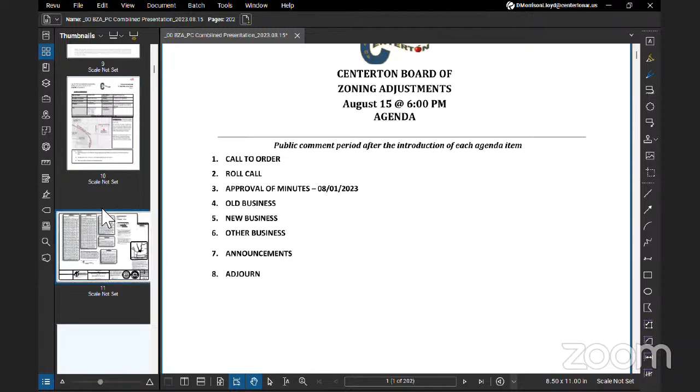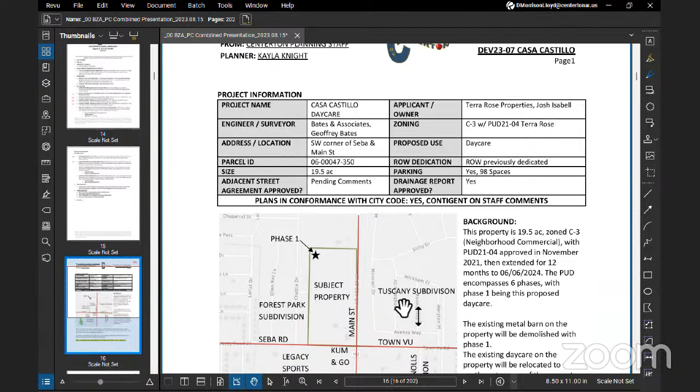You have that listing. So you guys asked what changes were made between the last previous approval and this one. So I made a list and attached it to the back of the report. That gives you all the stuff that happened with the plans, and then the little changes that were made to the adjacent street agreement.

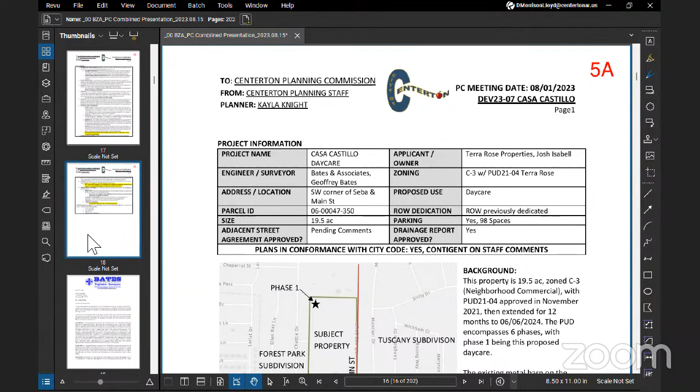So you guys approved the preliminary plans, but I asked that you make that contingent on staff comments. And also you wanted to know more about what the traffic study said. So in the folder, you'll see the traffic study that was included, and then we sent that to Garver to review the traffic study and make any comments they needed on it and kind of digest it for us. I think they're here to talk about it.

We're basically talking to Kayla. I know that y'all are looking at the traffic study to help determine what adjacent street improvements and things are going to be needed for this development. So there's kind of a lot riding on this. Our traffic engineer said that some of the methodology and the types of reports that they used throughout, he has questions on why those were used specifically. You'll see that sort of notated in there.

So I think basically we want to look at the base of how they're making their plans. And this is pretty normal in engineering. There are several different ways to go about looking at things, drainage, traffic, all of it. And so that's why you have an engineer look at it and kind of ask questions.

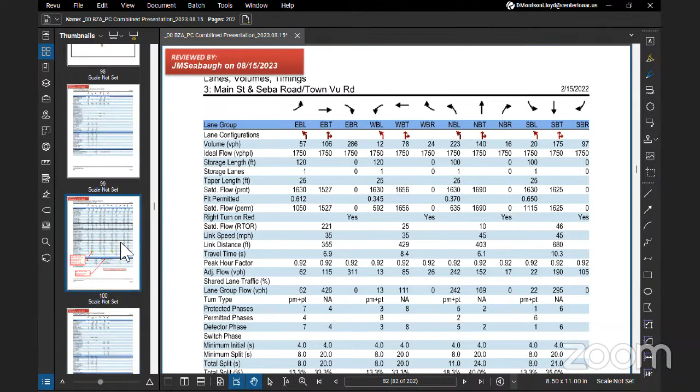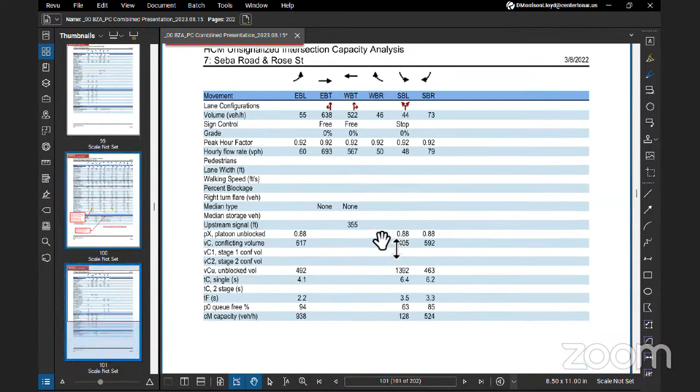Here's the thing, nobody wants anybody to do more than their proportionate share. That's the whole thing with the off-site improvement -- you're trying to look at what their proportionate impact is. So that's what we're trying to do, but if we can't get the base numbers right, even something that works right, then how are we gonna -- if you don't have that piece correct, or something that makes sense -- then how are you gonna look at the proportionate impact?

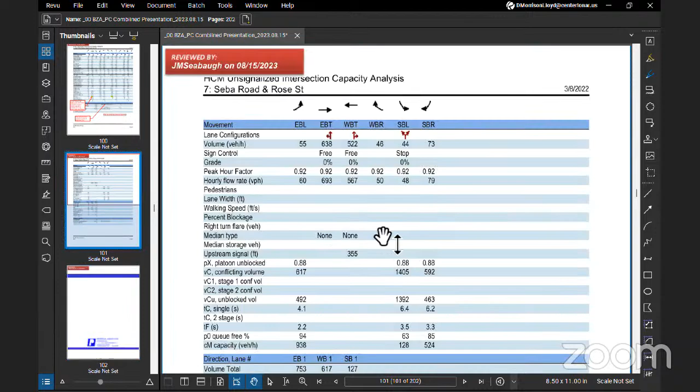And I do think the Kum & Go one's got to be looked at. But didn't you say the Kum & Go one did say that they anticipated there was gonna be a dedicated right turn lane? I think so, I have to look at it again. And that's kind of what this one's saying, so I think between those two, that'll be something to look at as well, once we get the number of facts. Everybody will be good.

We need to wait until we get that. After this, everybody's got it, right? The approval for Kum & Go was contingent based on getting the adjacent street agreement and fee in lieu agreed upon, so there's still some wiggle room there, because we haven't settled on that yet.

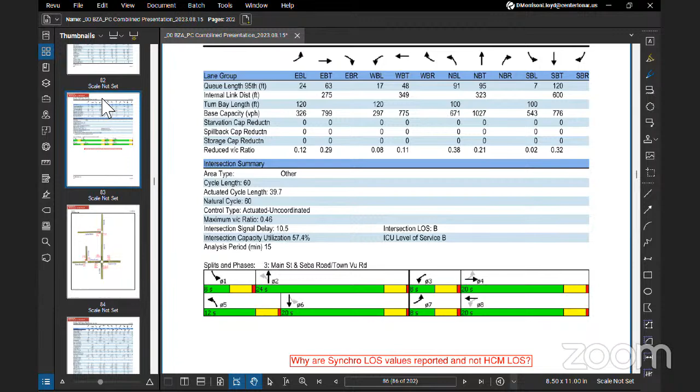I've got a question. Help me understand, you're recommending a SimTraffic analysis? What's that, a software? How is that done? There's several different modeling software. This is the way I understand it - so they run things differently. SimTraffic runs interactions between multiple sections, simulates interactions between them.

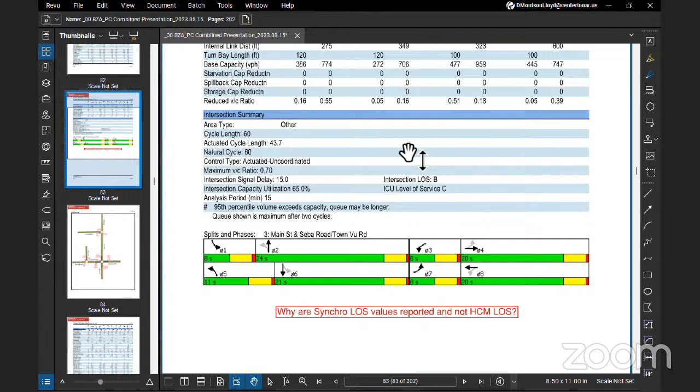One of the things they were concerned about was that the queuing for both on Seba is gonna back up, and then it's gonna start interacting with one of the intersections they're creating, Bell, and it could even interact with the intersection at Chattie, even further down. We don't know, but that's what he's saying. We'll find out tomorrow.

So with that, that's a TxDOT approved methodology - that SimTraffic analysis, TxDOT approves that for their warrants using that software. Is that a software that... I don't know if I can definitively answer that, but I can get more information.

What are your thoughts? Sorry, say it again - put you on the spot, but you're the traffic guy. No, I agree with her analysis. I mean, I think, you know...

Peter, the company that did this is a verified firm, they do traffic studies statewide. It's not a fly by night firm that did the study. But I think I agree with Julie - probably more information is needed because, according to what I'm reading here, it didn't take the whole picture. It's like a piece of pie, and we need the whole picture in my opinion to see what the requirements need to be.

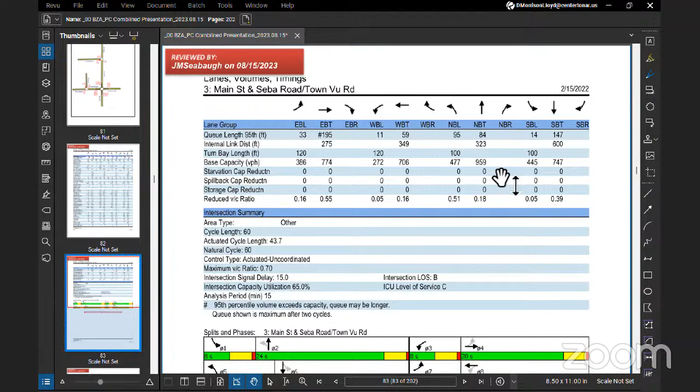And then any other comments in the report that would be part of the approval - there were special conditions and general conditions, which we'd love to show you and read. You may have the reports in front of you, so you could look at those. I think it's all good. The only one I don't see here is the approved use of aluminum fencing around the pond. It's here, we just haven't gotten a resubmittal yet, but yeah, that was talked about.

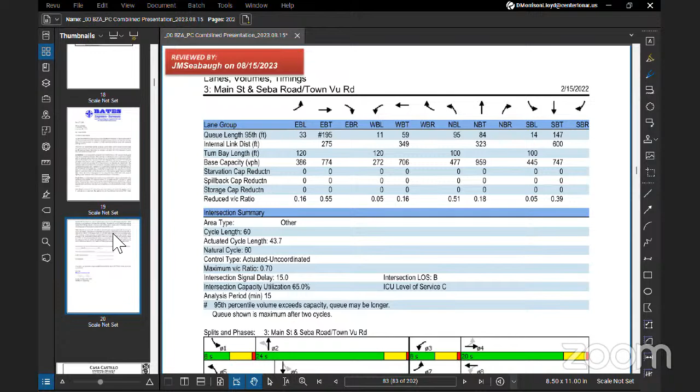I believe you guys talked about having trees along the north side of the property where there aren't trees, and some other things that are still pending a submittal. The lighting plan hasn't been updated to include some additional street lights and parking lot lights we added, like around the dumpster and in the parking lot. So any approval really should be contingent on making sure there's no light pollution, and on the landscaping, adding those trees along the north.

So, both Brad, wrought iron, right? The fence around the pond. Yeah, that was, you agreed on the aluminum. Okay, and our code states the top rung will be 5 feet. So that was the minimum that we have, whether that's what you want to ask them to do.

We have another development that is doing, I think, some type of metal fencing also, but they said they'll do whatever the code says, so I don't know if that's something y'all want to discuss or not. There's a difference, but I think they mentioned 5 feet themselves - I think they will do standard 5 feet, with the aluminum.

Wrought iron, so whether that's one of the conditions - yeah, adding that as a detail. It wasn't in there. Yes, but the motion just stated that the development plan was approved, it didn't state any of these conditions that are in the report.

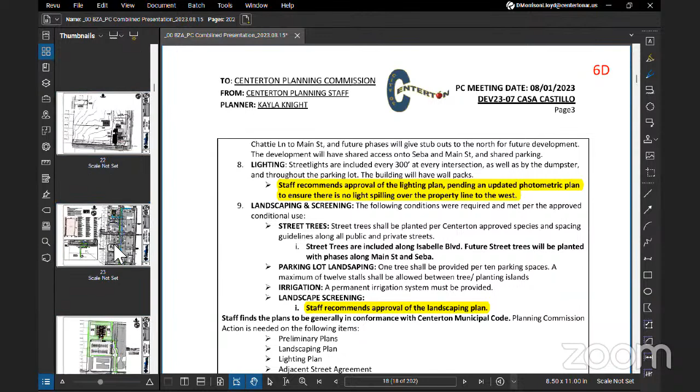Okay, anything you want to add? The only thing to add is it's contingent on like the adjacent street agreement, but it would just be with the development of the sidewalks to you guys. But we're not approving anything with the street agreement, is that correct? Right, we're not. Okay, yeah, it's probably not gonna make it tonight. But that's fine, we can discuss it whenever we do discuss that street agreement. But no, there's nothing else. Adam, thank you, we'll make you up on the street here.

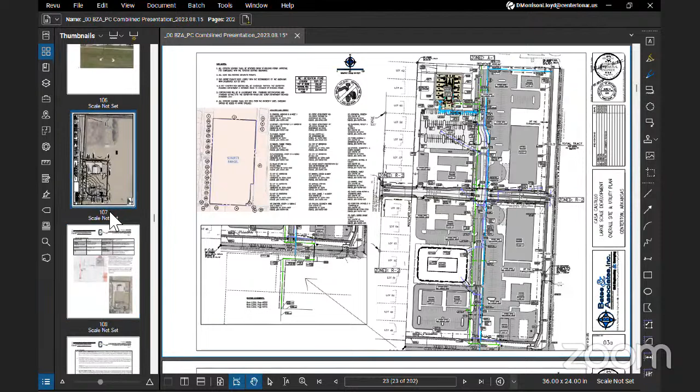This is John, I'll motion to approve development 2307, the daycare, with the included conditions in the staff report. Without the... Tony, I second. Is anyone voting? Yes.

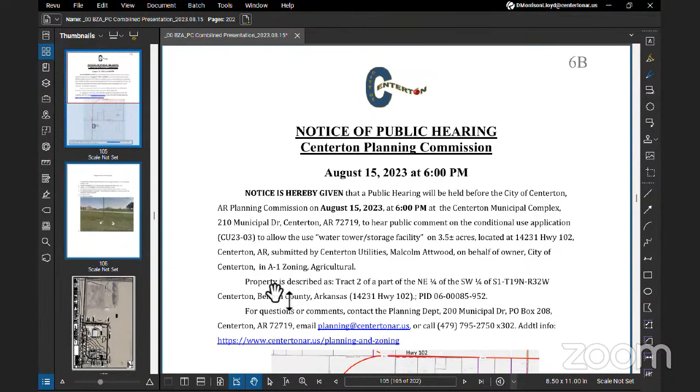Next on the agenda is a public hearing for conditional use 2303, the Centerton Water Tower at 14231 Highway 102. It is on 3.5 acres, and the request is to construct an elevated water storage tank.

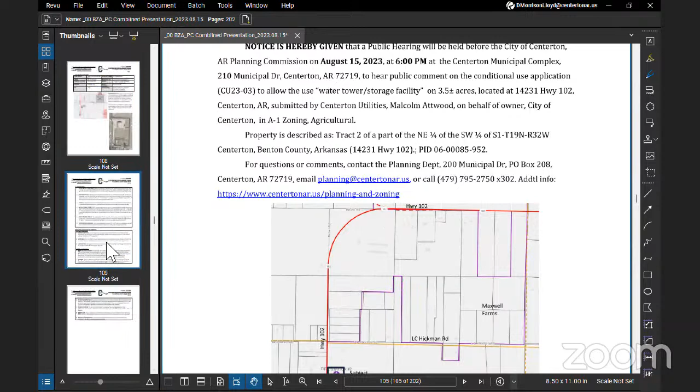Are you here to speak? Are you here to give comments? I'm forwarding that. We'll have time for that in just a second, okay? Give me just a second. If you want to have a seat, it'll take us just a little bit, it'll be time. Oh, we'll call it, okay?

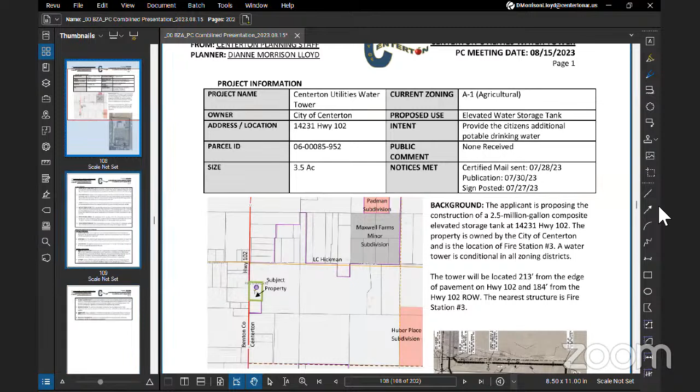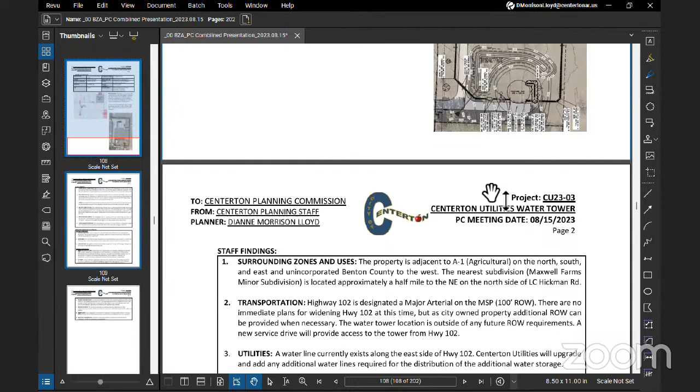The tower is 165 feet tall from the foundation to the top of the access hatch, which is the very tippy top of the storage tank. The storage area itself is 110 feet in diameter, and the supporting pole is 60 feet in diameter. The closest current structure is the fire station, approximately 182 feet to the north of the water tower.

A detention pond is also located adjacent to the tower, just to the north of it, curving around it, so that there's a pond in the event of a leak or something similar.

The adjacent properties are agriculture to the north, south, and east, and unincorporated Benton County to the west. On the other side of 102, the nearest subdivision is Maxwell Farms Minor Subdivision, about half a mile to the northeast, on the north side of LC Hickman Road.

For utilities, they will be putting in any water lines needed for the use of the tower. There won't be any employees stationed there; maintenance staff will continue working at their current location on Keller Road. As for deliveries, they have a diesel backup generator, so there will be periodic diesel fuel deliveries to keep it running.

The only landscaping or screening proposed is a 6-foot chain fence topped with barbed wire. Currently there appear to be 6 existing trees along the frontage of Highway 102.

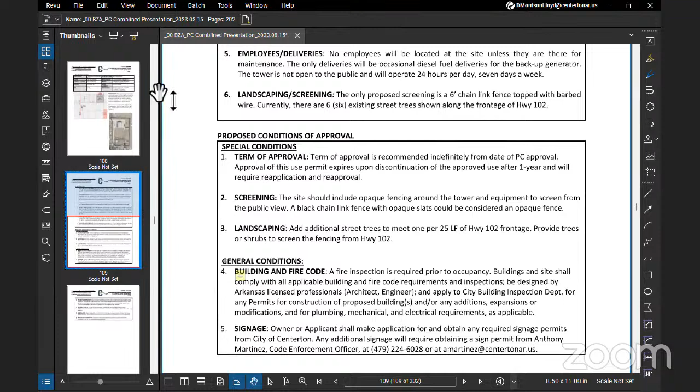Yeah, if you'll do - I will. Okay, this is coming back to you all. It's been a year ago, but this was - you had approved a draft and we didn't get it codified, so we are bringing it back for public hearing.

Keeping that this time, there's a couple of - I didn't go through this previously, but there's a couple of recommended changes. With the wireless communication towers, in certain zoning districts they could receive administrative approval, or they would go through a conditional use.

This lays out what they would be required to do, whereas right now, just like the water tower, we have nothing to really guide us. This would give them requirements - we get this quite a bit from wireless communication companies wanting to know what we require, and also about relocating on an existing tower.

So previously we had that communication towers shall be allowed by conditional use permit only within all zoning districts, with the exception of agriculture, where I would like the commission to consider adding industrial districts - your light industrial and heavy industrial. That way, they would only be allowed by right if they meet the requirements in regard to minimum size and use, and the tower is set back at least 100 feet, or a setback distance of the tower height, whichever is greater, from an existing residence or residential property.

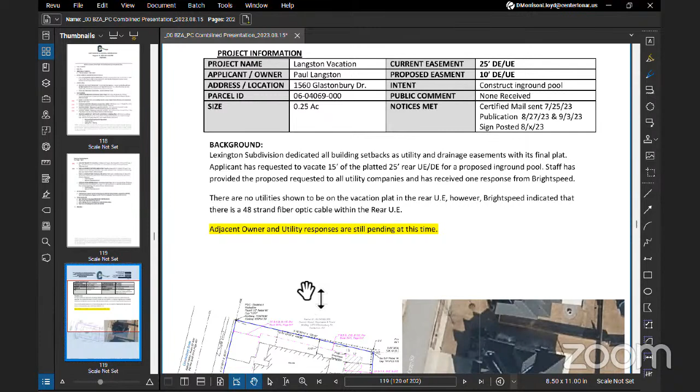Yeah, I think we're - walk us through what you're requesting. Basically, just put a... Eric, are you doing the staff report? Yes, sir. Since Lexington has dedicated all their building setbacks to be utility and drainage easement, a vacation would be required to allow for the installation of an in-ground pool.

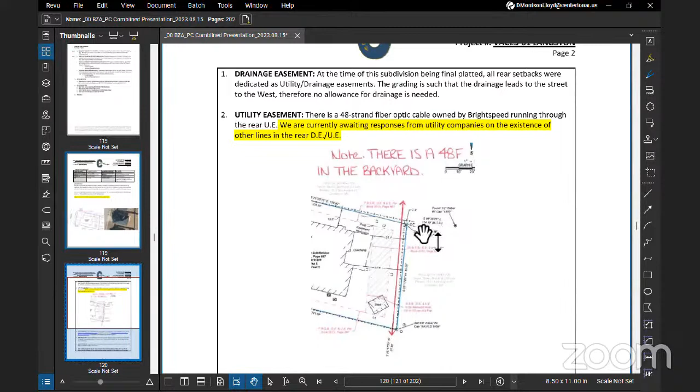So the applicant has requested to vacate 15 feet of the 25 feet of utility easement for the in-ground pool. There are no utilities shown on the plat, but we received a comment from Brightspeed indicating there's a 48 strand fiber optic cable running within the easement. However, what they provided as an exhibit doesn't show it to be an easement reduction issue. Carroll Electric came back and said they do have an existing line within the easement area, but potentially there's no conflict based on the location of the transformer. If any line needs to be removed or gets damaged, it will be at the owner's expense.

As far as the drainage easement is concerned, the way the grading is such that the drainage leads into the street and not towards the back, so there's no conflict with interfering with the drainage easement. We have received, of the 3 abutting property owners, 1 response saying there's no objections to the vacation. That's all it is.

So it shows that you're still awaiting responses from utility companies. How many utility companies are you waiting on responses from? Two. The others have come back saying they don't have any objections. That's - you said you're still waiting from Cox, right? I think Cox is correct, down on the street side. They would have no issue.

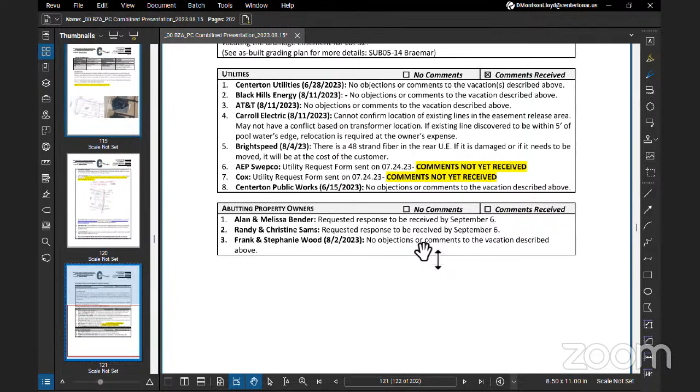All right, next on the agenda is vacation request 2302, Henson. Request to vacate 15 feet of the utility easement at 101 Florence Drive. This is R2, lot 69 of the Tuscany subdivision. The applicant here - the request that you're looking for.

David Henson, 101 Florence Drive, Centerton.

Similar story here - we want to put in a pool in the backyard, and to get the pool the way we wanted it, it's going to have to encroach upon the existing easement.

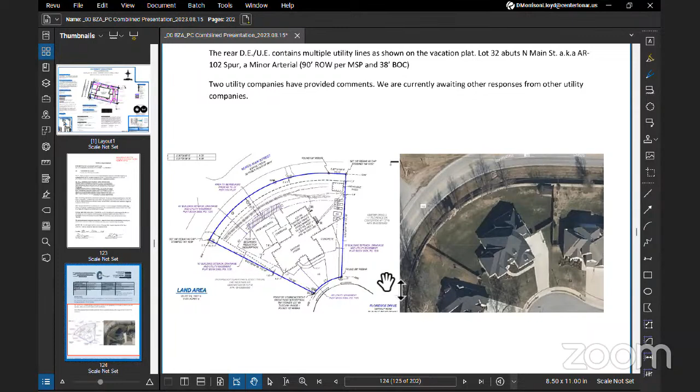The applicant has requested to vacate 9 feet of the platted 40-foot rear utility and drainage easement, located at 101 Florence Drive in the Tuscany subdivision. Tuscany has dedicated all civil and setbacks as utility and drainage easements. The rear drainage easement contains multiple utility lines shown on the plat, and it also abuts North Main Street, which is considered a minor arterial for the Master Street Plan. That would be built out to a 90-foot right-of-way per the Master Street Plan, with 38 feet width from back of curb to back of curb.

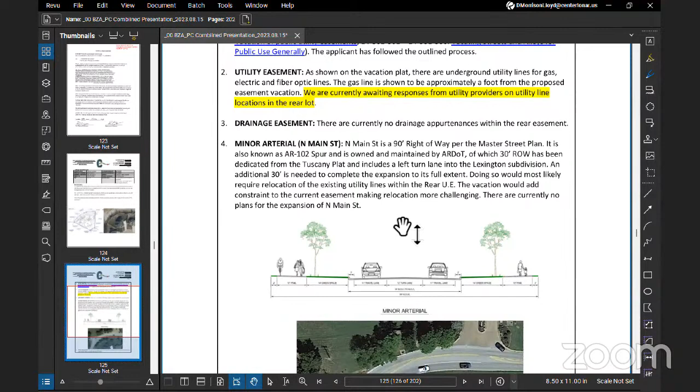We have comments, I'll get to that soon. As shown on the vacation plat, there are underground utility lines for gas, electric, and fiber optic, and there's a gas line shown to be approximately a foot from the proposed easement vacation. There are no appurtenances related to drainage in the rear easements.

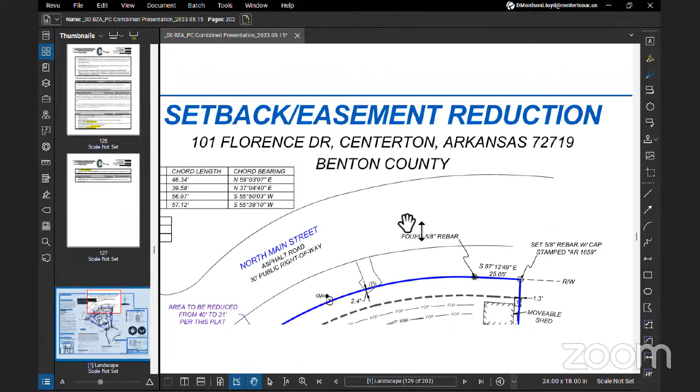Say something at this point. Yes sir, the gas line - they said it was a foot, hopefully there's only a foot between the proposed pool location and the gas line. You know what that means?

According to the plan... yeah, I don't know, I've got pictures. We had Safe Dig come out and mark out all the utility locations on the property, and it's more like 10 to 11 feet of room from where the gas line is to the edge of the proposed pool.

From the diagram, it's not just the pool, there's a retaining wall going in as well, and that's going to be 0 to 1 feet on top of it. The wall really shows for building the pool. So to me, the retaining wall would have to be the outer limits of what would be included in the pool measurement, you know what I'm saying? I'm not even sure if the retaining wall is going to be required, but if it is, it wouldn't make much difference. The edge of that retaining wall is where you start your vacation, wherever that starts. So however much that retaining wall extends, you have to account for that. Even though the pool might not be there, if you add sidewalk, retaining wall, everything - it's all counted, you don't want that to encroach on the easement.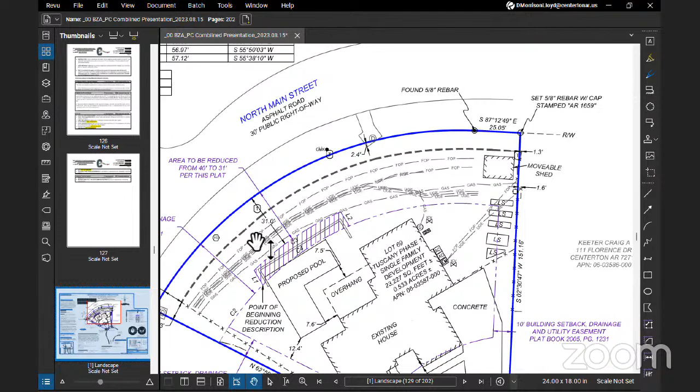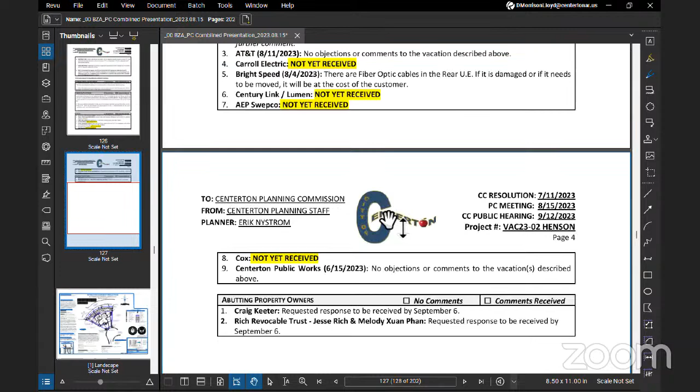We're just going by what they've got marked on-site. Well, I've got pictures there if you want to see. We can't speak for that. We sent out approval forms for every utility company, and they've come back with comments, we'll get to that here. The Safe Dig people will come out, they represent the utility - sure, we'll tell you where the utility is, we'll take a look at this.

You have a comment, Wayne? Well, as he gets through the utility comments, Centerton Utilities has a water line there. My concern is building on top of this water line, and whether they'll even allow it. You can't build a pool on top of a water line, that ain't... yeah, there's a water line in place. That's what Malcolm said.

One thing to comment on is the right of way. Since Main Street is a 90-foot right of way per the master street plan, should expansion take place, it would require relocation of utility lines. One concern is that the extent of the easement reduction would likely add constraint to the relocation of utility lines. Currently, there are no expansions planned for North Main Street.

That's an ARDOT-owned right of way, so part of this is not the city's - it was dedicated to the city. That's the plat, yes. There may be some highway prescriptive right involved, but this was all dedicated also with this. So we can put the... so that road - yes, it is still an ARDOT highway.

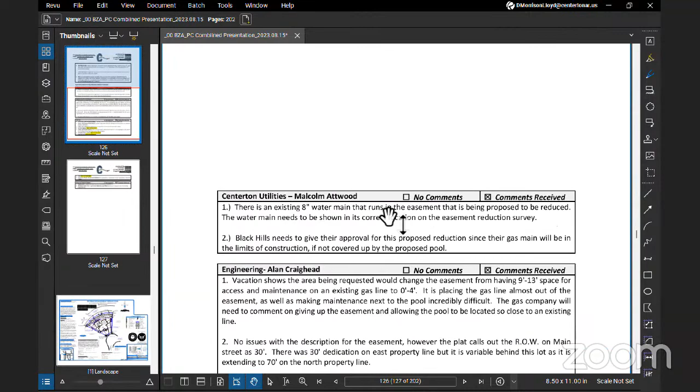We also noticed the space within the setbacks currently shows room where a pool can be located, providing an adequate amount of space without needing or requiring as much of a substantial reduction.

So commenting on Centerton Utilities, there is an 8-inch water main that runs in the easement that is being proposed to be reduced. The water main needs to be shown in its correct location in the easement reduction survey. They call for Black Hills to give their approval for this proposed reduction, since their gas main will be within the limits of construction.

According to Black Hills Energy, there are concerns about the reduction being too close to the line, and we're still awaiting further comment from them.

For AT&T, no objections or comments. Brightspeed, there is a fiber optic cable that runs within the rear utility easement, which if it were to be damaged or relocated would be at the expense of the landowner. We're still awaiting further comments from Carroll Electric and CenturyLink.

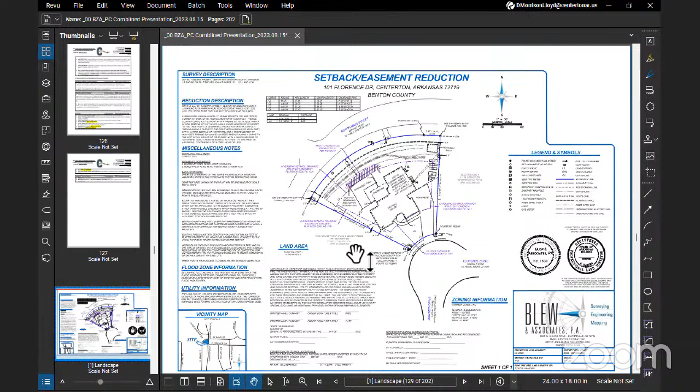Fine, that's it, that's our only option. All right, next on the agenda is application 2303, Thomas. This is a request to vacate 15 feet at 416 Trail. It is on R2, lot 7 of the Oak Tree subdivision. So with that, I have to recuse myself from this one.

This one, right? You're in charge. Yeah, he's going. Yeah.

Sir, the owner is here, survey company. Okay, and I just wanted to say that we're repeating what the previous two had as well on this one, so we'll go back - which is the street, and request to decrease the utility easement and drainage easement. Yes. Take questions about the survey and the documents here.

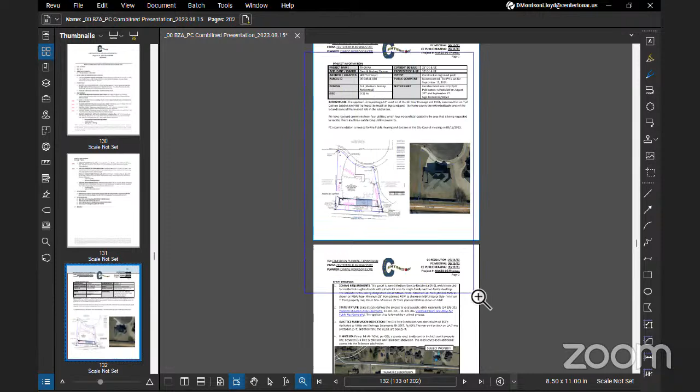Yes, it's pool season apparently. This property is located in the Oak Tree subdivision at 460 Trailwood Circle. They are requesting a 15-foot vacation of the 25-foot rear drainage and utility easement. That would leave them, of course, with the 10-foot easement. Now, one thing with their lot is they do have one of the smaller lots in the subdivision, and the house is built pretty much to the entire buildable area. So that is something to consider on this one also.

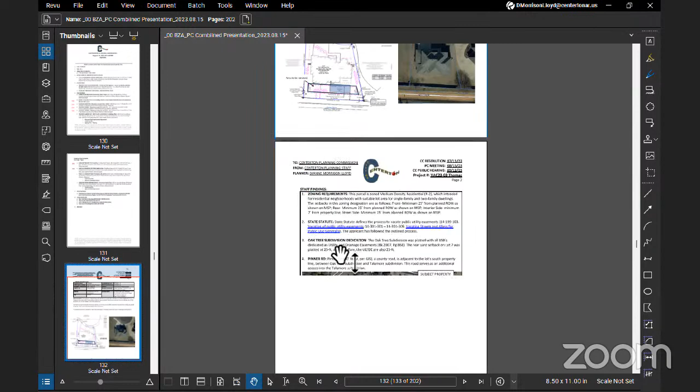We have received comments from all the utilities - forgive me for not updating that sentence. So we have received them from everyone, and there are 2 utilities that are located in that easement. Both of them appear to be south of the area they're vacating, so still within that 10 feet. But I will get back to that in a second. Of course, it is up to you guys to recommend for to go to city council.

This is an R2 subdivision, a zoned subdivision area. And like with the other subdivisions we've seen so far, all of the building setbacks were platted as drainage easements and utility easements. There's not any issues with the drainage for the area. Alan went out there and looked, and there's no issues with the drainage if anything, and that is vacated. So that's good news. We did, and of course, Pinner Road, which is, if anybody's ever been on it, is a small road that runs directly back behind this property and is kind of an extra access for the Talamore subdivision. So if there is a fire or something like that, they do have an excess access.

Measured on the GIS, it is 40 feet. It is a Benton County road, which could be improved someday for further access.

It looks like Oak Tree dedicated 15 feet and Talamore dedicated 25 feet, plus a utility easement. But measuring it on the GIS, it does look like there is 40 feet between any utility easement and right-of-way for that road.

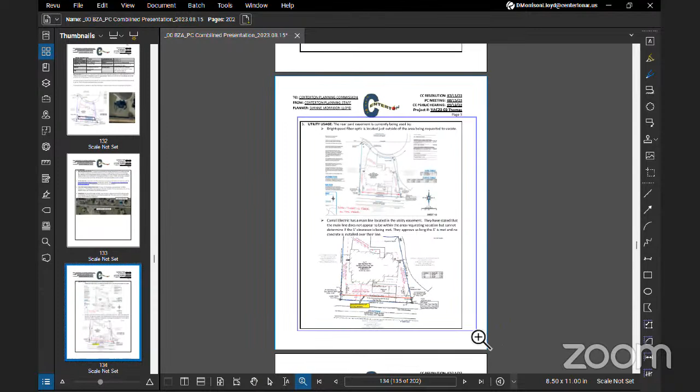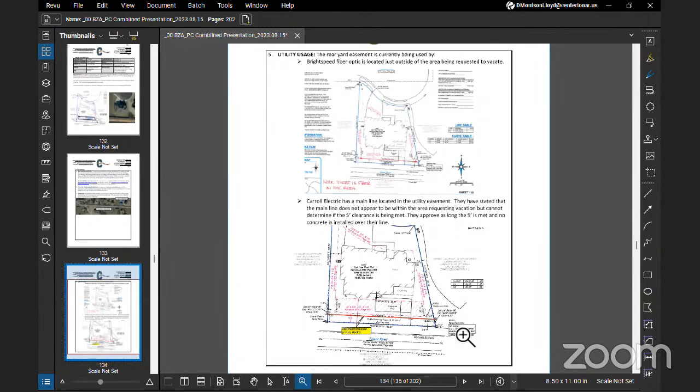Carroll Electric has a main line located in the utility easement, but they stated that as far as they can tell, their equipment is not in the area you're wishing to vacate, it's still within that 10 feet. They couldn't say for sure if the 5-foot clearance was still being met on the other side of their line, so they approve it as long as that 5 feet is met and no concrete is installed over their line. And of course, you break it, you buy it.

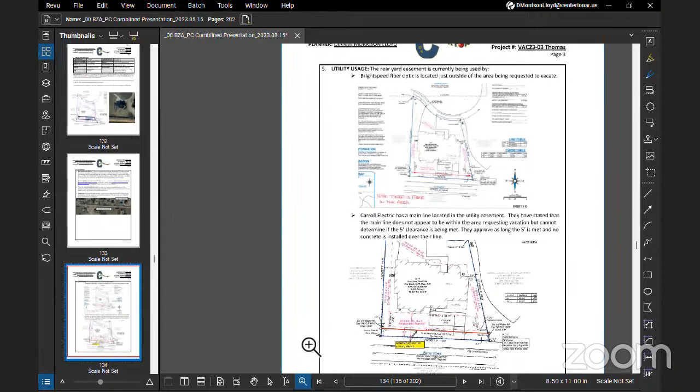Public notifications were sent to the adjacent property owners. We haven't received anything back from them yet - I guess they're on vacation at a pool somewhere. Public hearing publications are set to run on August 27th and September 3rd for the September 12th city council meeting. So if y'all approve it, then it would go to city council.

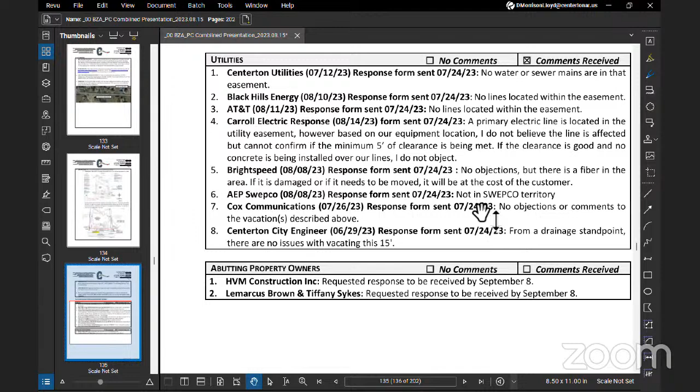They already have a vacation plan completed. I did mention to Nathan there were just a few little minor things on there to fix, which of course would be recorded with the Benton County Circuit Clerk if it's all approved.

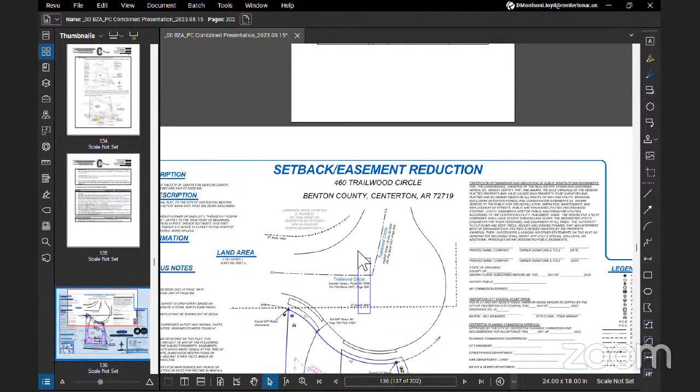There are utilities, but they do not seem to think they're going to be impacted. Just Carroll Electric said they couldn't tell for sure the 5 foot was met. I would like to point out that I just asked them, they marked it. That was the only concern on that one, and it seems to be marked.

What is it, 18 inches on each side of that space, and 5 feet on the outside of that. Right, so we're marking 18, 5. I did notice that Brightspeed and Carroll Electric pretty much have the exact same location for their lines - those were from each of them, I did not draw those. That's what I got from the utility companies.

You didn't understand the price. You break it, you buy it. Yeah.

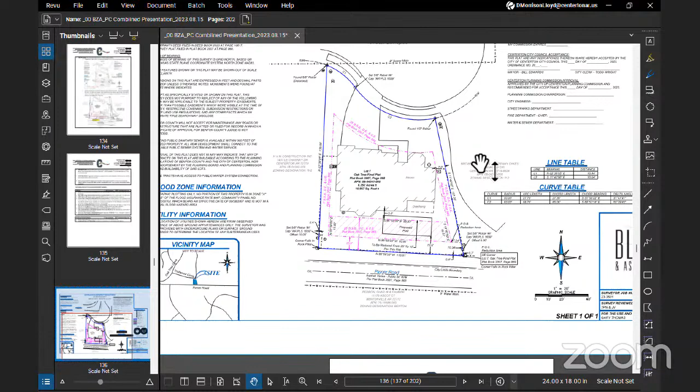Are you not the applicant? I'm Daniel Brady with Phoenix. Want to give us an overview? Yeah, Matt. I have some parking, and then there's only a drive-through for dropping off laundry. The applicant submitted a large scale development for the use of a laundromat, which is permitted under highway commercial as it's currently zoned.

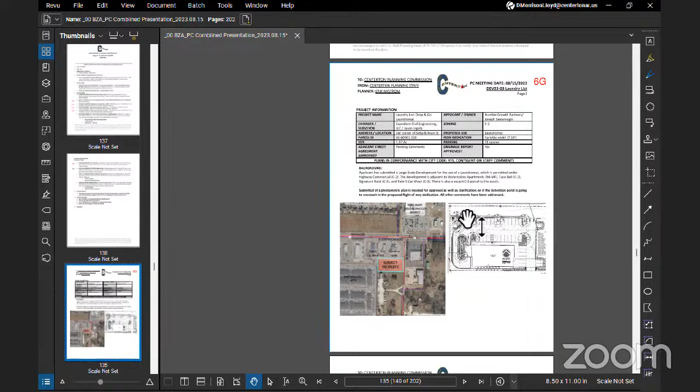The development is adjacent to an R4 multifamily zone and various other commercial establishments. Watercolors Apartments is the only residence adjacent to the subject property.

There's a proposed sanitary sewer connection coming from Greenhouse. There's an existing dry detention pond to the east of the property. It does show that the eastern edge is encroaching on the proposed right-of-way dedication. We need some clarification to figure out who would be responsible for that. There's proposed parking spaces.

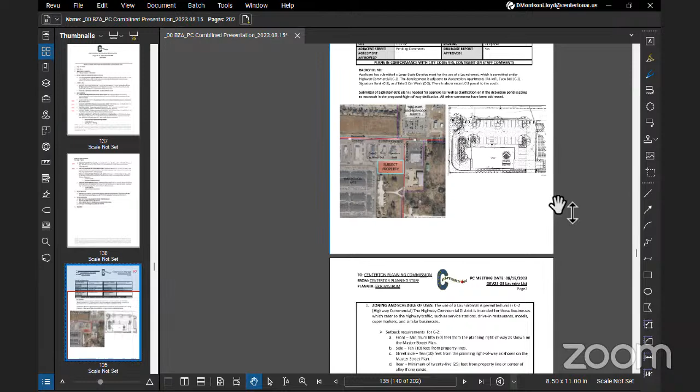There's going to be 31 spaces, 2 of which are ADA requirement, which exceeds the required number of 29. It's going to be located next to Greenhouse Road, a major arterial, and there's an existing 42.85 feet already dedicated. These plans will dedicate 15 feet more to the right-of-way.

Improvements agreed to will include curb and gutter, asphalt concrete road with a 10-foot trail, and street trees. An access easement has been proposed at a stub out near the southeast corner, providing future access to whatever gets developed to the south. There's an existing access easement on the north side of the property, both of which will provide 2 access drives to the commercial subject property.

We're still waiting on a photometric plan, but as it is there's not much conflict due to the commercial and multifamily apartments already providing screening along their property lines. The dumpster enclosure is supposed to be brick masonry.

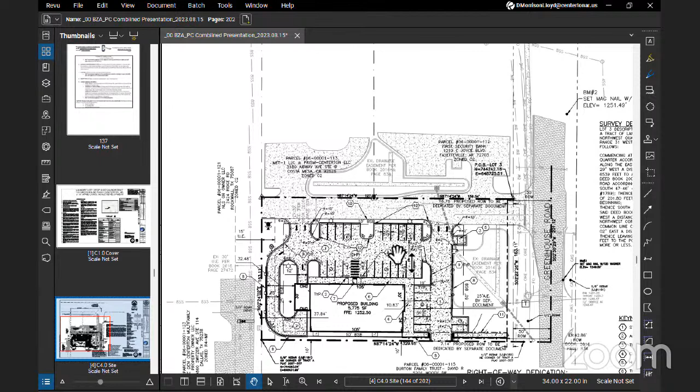There's about 10 trees and 181 shrubs to be provided as far as landscaping goes in the parking lot. There's no opaque screening provided, as I said, there's already screening along the Watercolors Apartments property line. I find the landscaping plan to be satisfactory. So we're looking to approve the preliminary plans and the landscaping plan for Laundry List tonight.

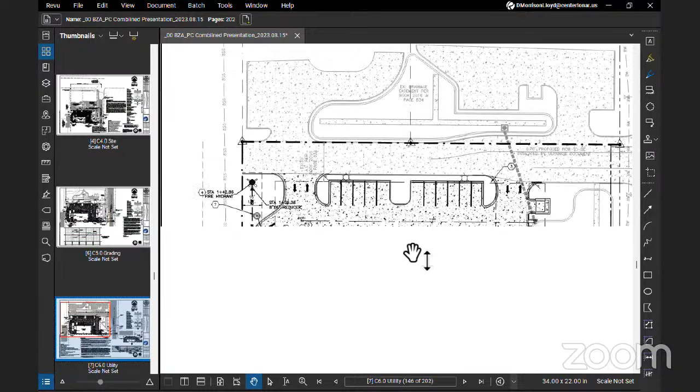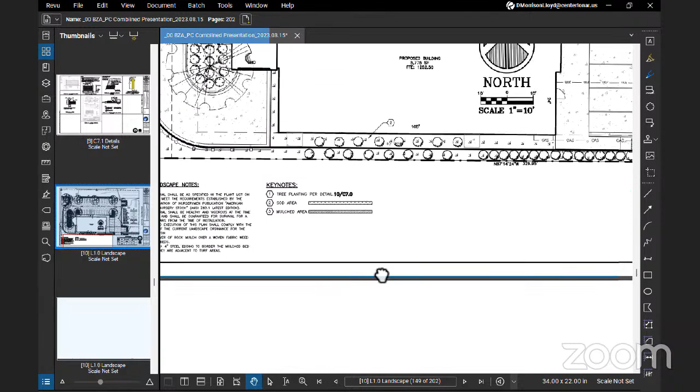With the shared commercial, you have Taco Bell, and yes, where those driveways back up, you're going to have that shared alleyway. The westernmost access is a little bit off, but with the detention pond in the way on the east, it doesn't make that possible. Yeah, with the front, with the rear window.

Car wash further down. I see that your proposed dumpster is for, what about the building, is that part yet on? As far as the building goes, I mean, that's not our part. Do you know what the building will be? I think it'll be partly brick up, and then I don't know exactly. It'll be partly brick.

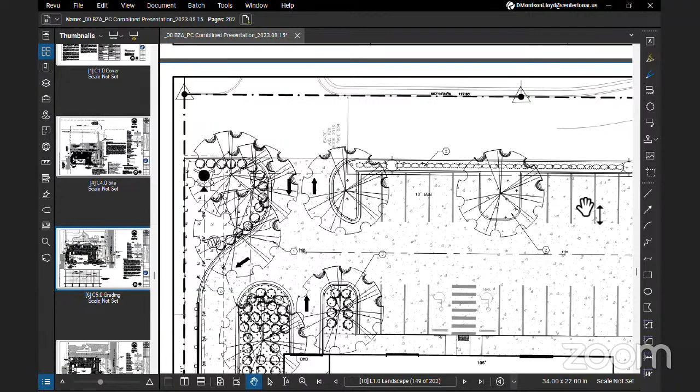All right, next one is subdivision 1909, Tuscany Phase 3, final plat. This is at the corner of North Main Street and Town Vu Road. It is up by 2. This is 15.93.

Yes, this is, as you stated, Tuscany Phase 3. It is 46 buildable lots and 2 unbuildable lots, one of which is a detention lot and the other is a lift station lot. The right-of-way was all previously dedicated in 2014 for all the Tuscany phases. There are 4 phases planned, so there's just one remaining after this one. The drainage report has been approved. The bonds, after some back and forth today, did finally get approved by everybody, and everybody's happy on those today.

They did have a change order from when you guys first saw the plans way back when for preliminary approval. They added a detention pond at that southwest corner. They also did improvements to the existing monster detention pond there by the clubhouse in Tuscany.

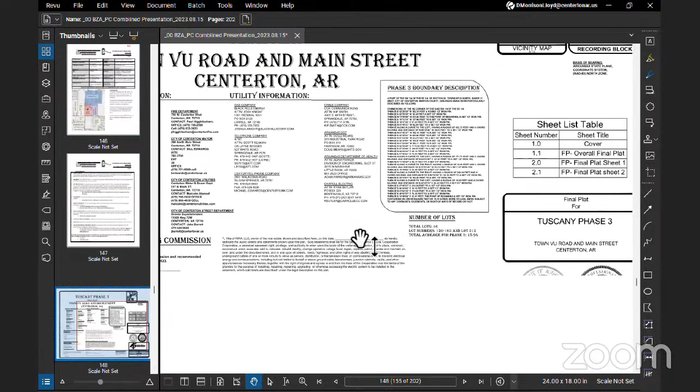They paved the section of road, Longbourn, with phase 2 five years ago. Different builder, different engineer, different owner. That area doesn't drain, so corrections need to be made.

But the way it's divided, beside the clubhouse, that's what, 50, 100 feet, whatever, road right there. Correct. So that needs to be fixed and corrected. So we're looking at for phase 4, they're gonna have to fix that.

There's gonna require significant engineering work to be done. You figure out where the problem is exactly, and then what the best way to solve it. Can't really bond anything for a completion thing, because it can range anywhere from $1,000 worth of work plus surveying cost, to over $20,000 if they'd add a whole new box, open cut, put a culvert in. So we're looking at adding that to phase 4 for the phase 4 group to fix that area.

And that was built 5 years ago. Somewhere, was it March 18th? Looking at Google, there's March 18 or March 20, somewhere between those, that 2-year section. So 4 to 5 years.

And it doesn't have any drainage connection there now. So do you guys tie into that when you put the road? The road was already built, 300 feet south of where this problem is. But the houses in that area were included in this phase for building. So the way the phase line's drawn, the issue is part of this phase, but it was also built 5 years ago.

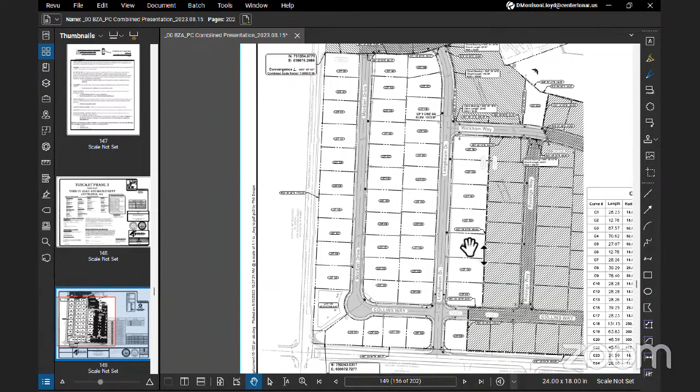One thing they do have attention on is the sidewalk south of that public property. That's already been cash bonded for completion, but we don't have it in hand yet. No, they gave us an estimate, but we do have an estimate that was approved.

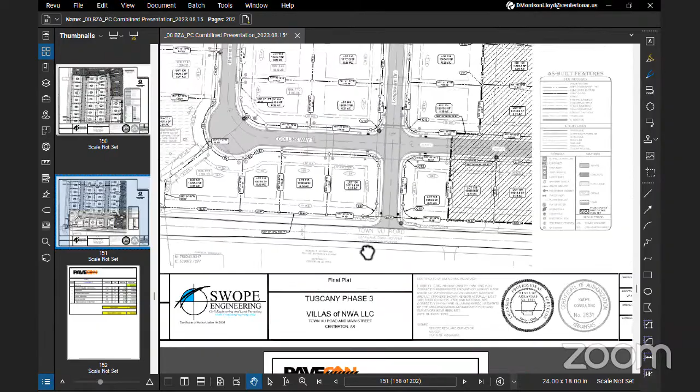And that's for 230 linear feet of 5-foot sidewalk, to connect from Longbourn and Wickham Way on the south side of the clubhouse to lot 212, which is kind of its own separate animal up there, down by the POA property. Yes, it's back behind the basketball goal.

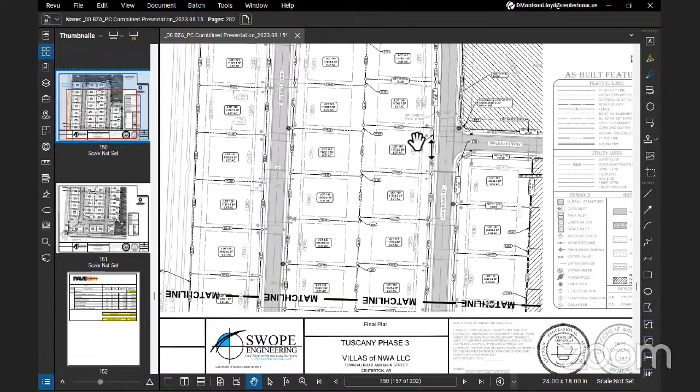And the warranty bonds, like I said, they were approved. Streets and drainage, now we've adopted new rules where it's 50% for 2 years, but since they started previously, they're doing 100% for 2 years, and that's the construction cost, correct, Alan? For the bonds, the 100%? So when this construction started, the original requirement for bonds was 100% of the construction cost. End of last year, we amended the code, so it's now 50% of the reconstruction cost.

That's if we have to go in and fix something, we're pulling the bond, it costs us more if we rip out the curb and re-pour it than it costs to pour it originally. So the unit costs go up, but with 50%, we wouldn't have to replace all the curb, and there's a minor savings. This one started with 100% of construction, so they did their drainage bond at 100% of construction cost, and their street bond exceeds that 50% of reconstruction cost.

And the bond amount is, like I said, approved. We do have drafts of the bonds. It's $796,062.14 for the streets and drainage.

Water and sewer is typical normal where it's 50% for 1 year, which is $204,614.25. And I already mentioned they do have the cash bond for the completion of the sidewalk, the adjacent street agreement. All of that was completed years ago. Like I said, the record drawings just have some minor comments, just labeling and things like that, and same thing with the final plat.

So based on the information that we have, staff finds the plat to be generally in conformance with the Centerton Municipal Code.

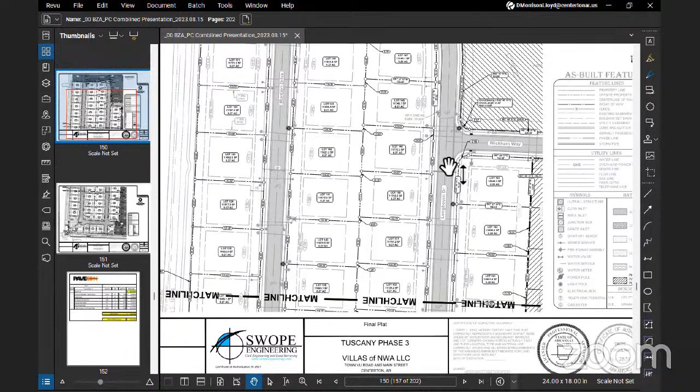Let's see, you can see phase 4 as well. I do have that, yes, this was for me. Oh, is that updated after it was printed? So the streets is 55,631. Yeah.

There's a matter. Any other questions or comments from the commissioner? There's some minor cleanup, typical staff comments, but otherwise, that's all.

With that, I would entertain a motion for subdivision 1909, Tuscany Phase 3, final plat. John Bush moved to approve subdivision 1909, Tuscany Phase 3 final plat, with public comment on the drainage at phase 4. Motion and a second. Is anyone opposed?

Thank you. I have a question about this next one. I own property next to that, it adjoins it. Yes, you probably should. I will call on the... Just note that Jerry is recusing, so.

So it's $497,379, and water sewer is $414,315. Okay, I can't see your... The density is 3.3 units per acre.

Any outstanding comments? Like I said, the covenants are being taken care of. The as-built and final plat was just minor labeling, cleaning stuff up, nothing that makes any big changes. It is our 3rd subdivision. Like I said, they do have the 2 detention ponds. Alan has approved the drainage, and the site inspection, all punch list items have been completed on this one.

Edgewood, between Edgewood and Shirley Estates to the south. All of Edgewood Road has been paved from the edge of their property all the way out to Tycoon, so that was completed with this. There's just super minor comments left on final plat and as-built.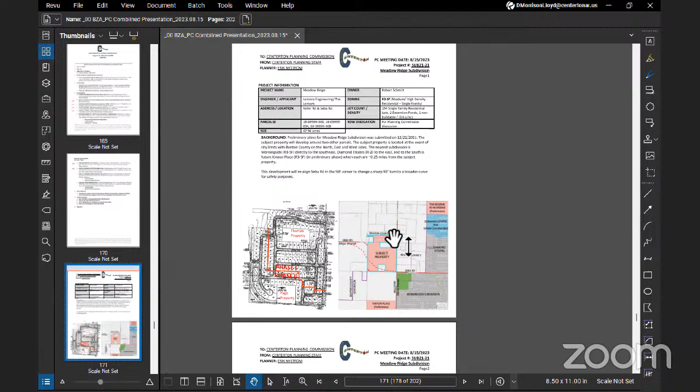The lot has been proposed to be split into 2 phases. Phase 1 will consist of the northern, northeastern part, lots 1 through 99, a total of 99 lots including the lift station and the detention pond to the north. Phase 2 will consist of 55 lots with a detention pond. We'll have access to water from both Keller and Seba. The lift station will be installed with phase 1, with the force main running south parallel to the west side of the road, eventually tying into lines in Morningside. It's not located within a floodplain. There are currently 2 freshwater ponds which will be filled and need to be compacted.

There will be access for phase 1 from Keller Road on the east side, and phase 2 will have access from a western, southern access way from Seba Road. Both of these right of ways will be proposed to include 10-foot trails.

Per the adjacent street agreement, 40 feet of right of way should be dedicated on Keller Road with a 10-foot trail, asphalt and a ditch, no curb and gutter as of now, with a 14-foot green space. There won't be any street trees due to constraints from the grading of the ditch. There will be light poles on 300-foot intervals along Keller.

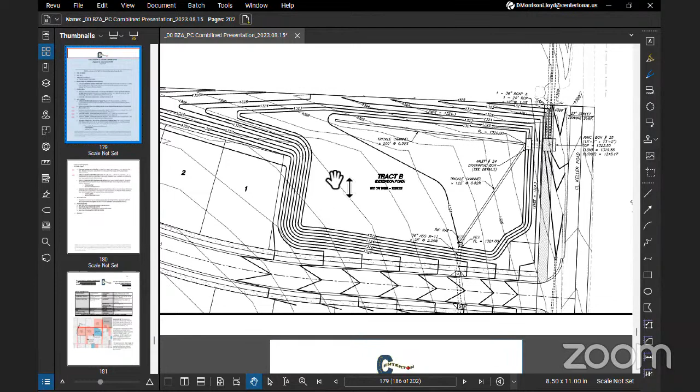Then I have to slam on the brakes to make the turns, instead of continuing at your normal speed. Improvement.

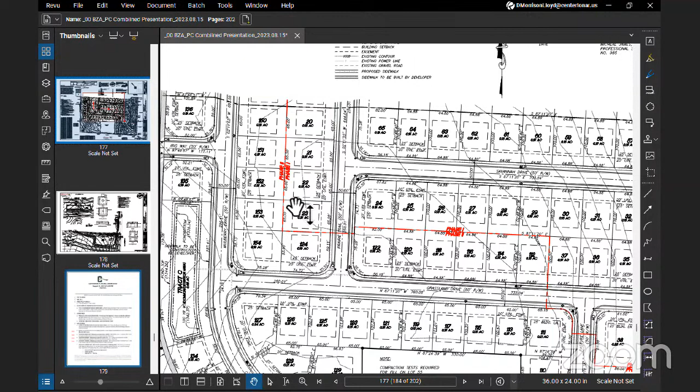We still need the cost estimate for the construction of SEBA so we can work on the cost share. But everything going on right now is just on Keller Road with phase one. Phase one will pave Keller from the corner to the north property line.

Is the adjacent street agreement ready for approval, or just the subdivision preliminary improvements? The agreement just states that there will be cost sharing, but doesn't delineate what exactly that cost sharing is.

Not hearing mention there's no curb and gutter. Correct, yeah, the adjacent street agreement is just paving the dirt road and putting ditch lines in between the road, the ditch, and the trail. Just behind that's a force main, so there's nowhere to put trees along SEBA, whether it's in the right of way or on Keller - anytime we do anything there they'd get mowed right over. And then anything just behind the right of way is on top of the force main, and I'd rather mow over a tree than run up a force main. So there's really nowhere to put one anywhere on Keller.

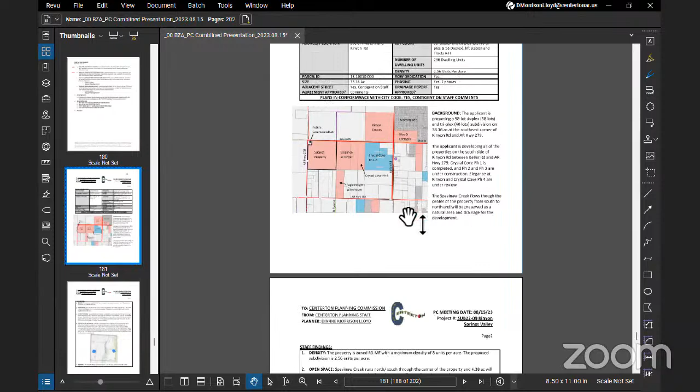They are dedicating right of way and doing 2 phases. The drainage report has been approved, and the adjacent street agreement comments are pretty much under control. The applicant is developing all of the properties pretty much from Keller Road all the way to Arkansas Highway 279, so this is the far most western project. There is also Elegance at Kenyon and Crystal Cove Phase 4 currently under review that will go between this and the Crystal Cove Phases 1 through 3 on the very far east.

And I think the density is 2.5856. We have a cricket. 2.56 units per acre. It is R3 multifamily, which has a maximum density of 8 units per acre, so they are definitely under that. Yes, I'm totally distracted by a cricket.

Open space, like I noted, the Spavinaw Creek runs south to north through the center of the property, and approximately 4.3 acres remain undeveloped due to wetlands and drainage in this area. They are making every effort to save as many trees as they can through there, but they do have to do some grading through that area. It will be a nice, pretty area for the subdivision.

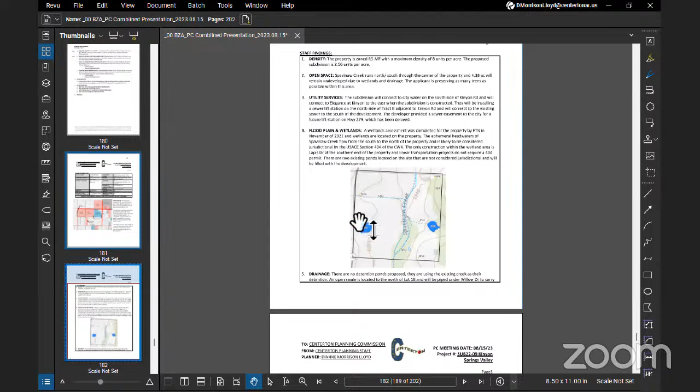Utility services: they are connecting to city water on the south side of Kenyon Road, and it will connect to the other subdivisions going in to the east. There is a lift station on the north side of Tract B, right up by Kenyon Road. There is an existing easement along Spavinaw Creek that the owner dedicated to the city a while ago for a future lift station that is on hold right now to help with that area. So they are having to do a lift station.

They have completed a wetlands assessment for the property, done by FTN in November of 2021. There are wetlands located on the property. There is no floodplain, but Spavinaw Creek flows south to north through the property and is likely to be considered jurisdictional by the USACE under section 404. The only construction within that wetland is a street; Lapis Drive will cross over it at the very southern end of the property. But linear transportation projects do not require a 404 permit, so they are good to go with just the road crossing there.

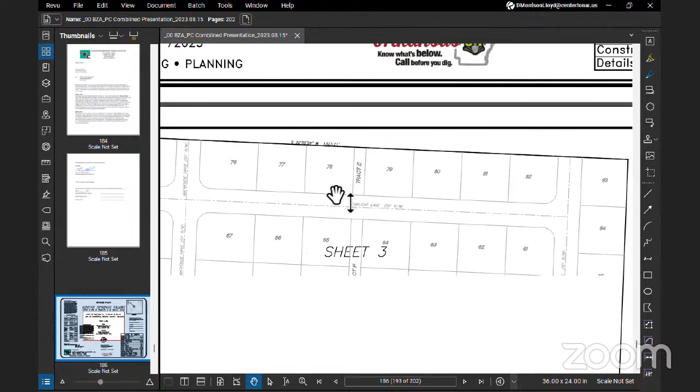Tim kind of had to beat that into my head for a while, but I finally got it. There are no detention ponds proposed for the property; they're using the existing creek. There is an open swale, which is already a natural feature that was there, located on the north side of lot 18 to direct water to pipes under Willow Drive currently.

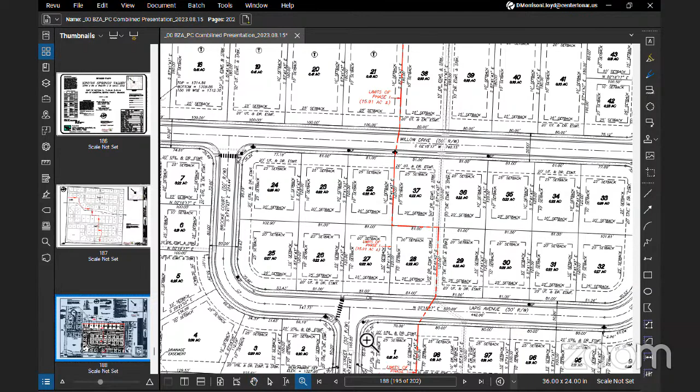The adjacent street agreements: Kenyon Road is designated as a major collector with 80 feet of right of way, and Highway 279 is a major arterial at 100 feet of right of way on the master street plan. Arkansas Highway 279 is an Arkansas state highway. For Kenyon Road, they are dedicating 40 feet of right of way, which is currently a gravel road. From the property line, it will be improved to 25 feet, that's 2 12.5-foot travel lanes of pavement with 2-foot shoulders on each side and ditches, because they are paving an entire section of street. Whoever develops the north side of this property will have to do the curb and gutter improvements for Kenyon Road.

They are providing a fee in lieu for sidewalks along Kenyon Road. This was a determination through Public Works and Engineering that a sidewalk would not be feasible at this time because there's a narrow culvert there on Kenyon Road, but they are doing a fee in lieu, which is $23,641.06 for that sidewalk to go in the future.

As far as street lights, they'll be placed at the intersections for the subdivision only, to get into the subdivision.

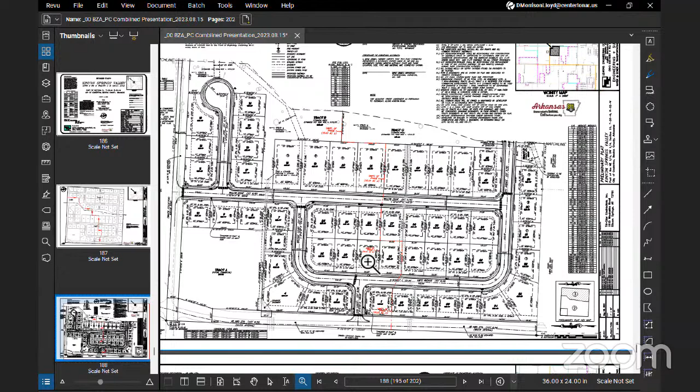Under other business, there are proposed amendments to zoning code section 14.04.04, zoning districts, subsection J, RTH-D residential townhouse duplex, and K, RTH-MF12 residential townhouse multi-family.

Fire is okay with these changes so far. This has already been reviewed by the fire marshal. No, that's why I have two things highlighted, but I'm gonna call them.

Because they just passed a code, I just added townhouses in both, residential townhome duplex and in the 12. They are required to be. Anything twin home, townhouse, let's be sure. You're okay with it? Yes. Now that's, she's just amending the code to match the building and fire code. I think that's the only change for it. That's all I have, and then, well, we reduced the multi-family. As long as you're- and they're sprinkling themselves. Right.

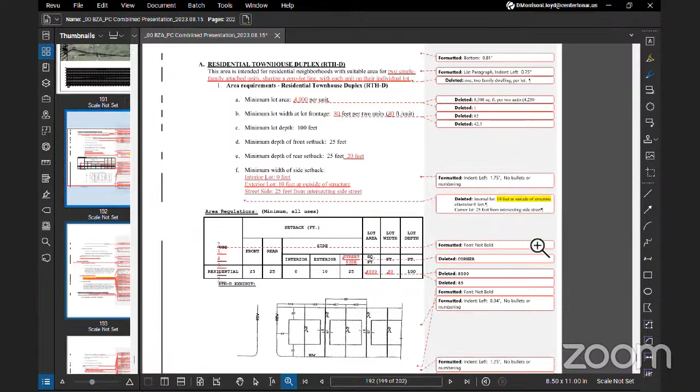So we start with the duplex, and you can see what I have deleted, so that it makes it more self-explanatory what this zoning district is. It is that they may be attached single family, but they are on their individual lots, whereas in our other zoning districts you have multiple units on one lot. So I changed the wording instead of '1 two-family dwelling per lot,' which didn't really clarify, to '2 single-family units attached, sharing a 0 lot line, with each unit on their individual lot.'

Now, we went through here and the lot area, we compared it with what we have in the R3 duplex and multifamily. R3 duplex is 4,000 square feet, so we just tried to make it consistent. That one's attached on its own lot. These are just on their own lot. Minimum lot frontage, 80 feet per 2 units, which is 40 feet per unit.

Minimum lot depth, 100 feet, the same. The front setback, 25 feet. The minimum depth of rear setback, 25 feet, we recommend changing that to 20 feet. The only two zoning districts that have 25 feet are our R2, which is medium density, and our R1 low density. So everything else has that 20 feet, so we wanted it to be consistent.

This the heights maybe? Or because of the height that we- no, because we don't have restrictions. This is the same restriction at 35 feet, 2-story. I want to make sure that we do, yeah, 35 feet, or it says 2.5 stories, which we'll get into that.

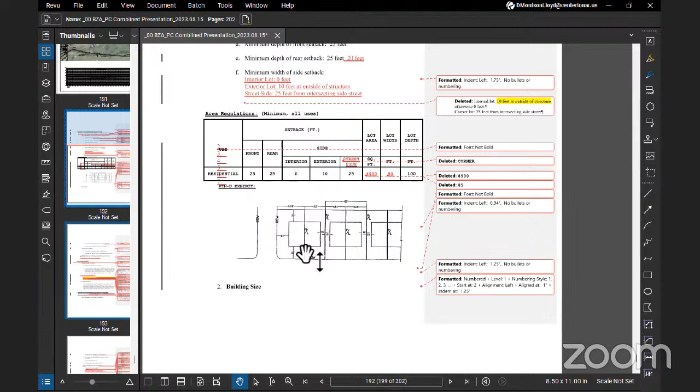That's the same, street side 25. I just changed the wording and added that street side. And then I amended the chart below, because previously it had lot area 8250, or whatever, something 8500. It didn't make sense for one lot. Actually, this 80 foot, I need to change that to 40. I thought that had been missed, that one.

And then the chart below, we will redo a chart. This is not correct with what we have about the setback that we do. Everything else looks the same. Building size did not change. Well, the coverage, the square feet, we did not change, but the building lot area was 40%, which when you work all this out with the required setbacks and so forth, you couldn't even meet, you couldn't build to those setbacks and meet the 40% requirement. You would have built to a 50%. So architectural treatments are the same.

I tried to make these both very consistent. This was on the multifamily, maximum number of accessory buildings, 1 per unit. There's only a 30-foot minimum width on these, but maximum height is 35 feet or 2.5 stories, whichever is less. That half story came from where some people would convert their attic.

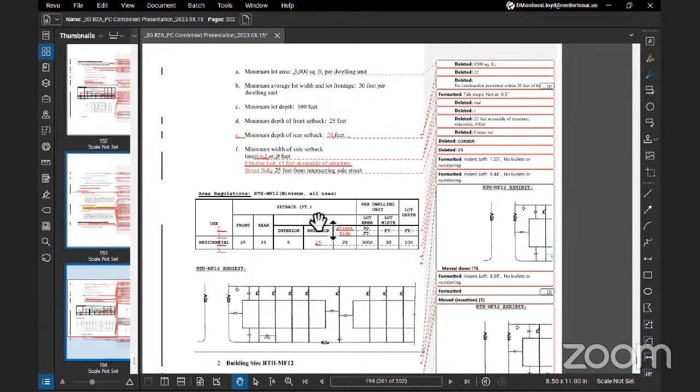I'd like to recommend also 20 feet for rear setback. Then the minimum width of the side setback - interior is 0, exterior is 15. It was 25, which meant 15 on each lot, so 15, giving a total of 30 feet between a group, and they're limited to 5 units. Then street side is 25 feet from a street. So we revised the chart with the exterior being 15 feet and everything else is the same.

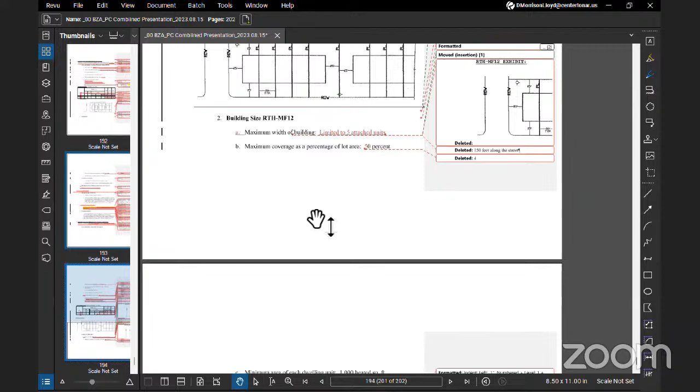I just changed the street side wording - it said corner, which didn't make much sense. We'll have to revise the exhibit to match this, and then building size. We have the maximum width of a building, which we'll have to reword so it makes more sense. I'll probably just remove that and put limited to 5 attached units. Maximum coverage percentage of lot area is 50%, which is pretty standard.

Architectural treatment, the same 75% masonry. Accessory building coverage of rear yard, 20%. When we figured that, the other one was actually 200 square feet, I think. So we may want to look at changing that to 200 square feet, or leave it at the 20%. Building coverage - well, it's 20% of what? So we need to discuss that one.

Just a limit to one accessory building, same thing about the 2.5 stories or 35 feet, whichever is less. Townhomes must be sprinkled. Then parking regulations - they shall provide 2 vehicle parking spaces per dwelling unit, with a driveway connecting that's the same as it was. So, any comments?